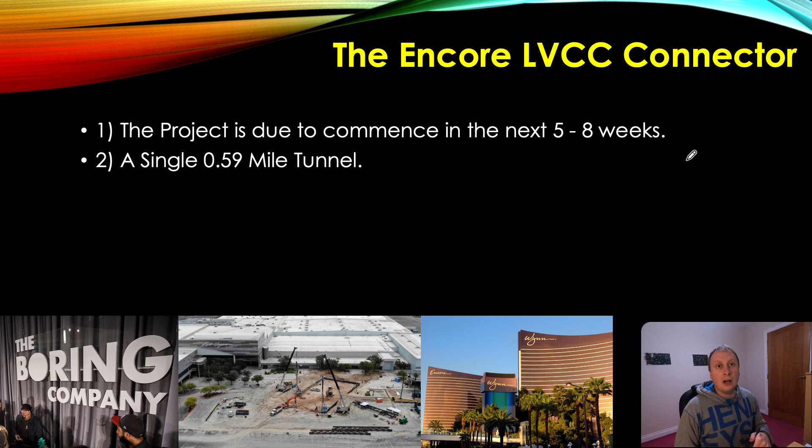It's a single tunnel, 0.59 miles long, which is a good length, slightly longer than the Resorts World tunnel. It also has a really good alignment, very, very straight for the majority of its route.

That's good for the TBM and for the conveyor belt system, because we don't want delays like we had with Resorts World. Hopefully they've overcome those particular issues with the conveyor belt system, spoil removal, that kind of thing, but hey, we will find out.

It will be built by Prufrock Revision 2, so it's kind of like a slightly revised version of the TBM that built Resorts World. As far as I can see, it looks pretty much exactly the same, but maybe they've made some changes internally with this particular model.

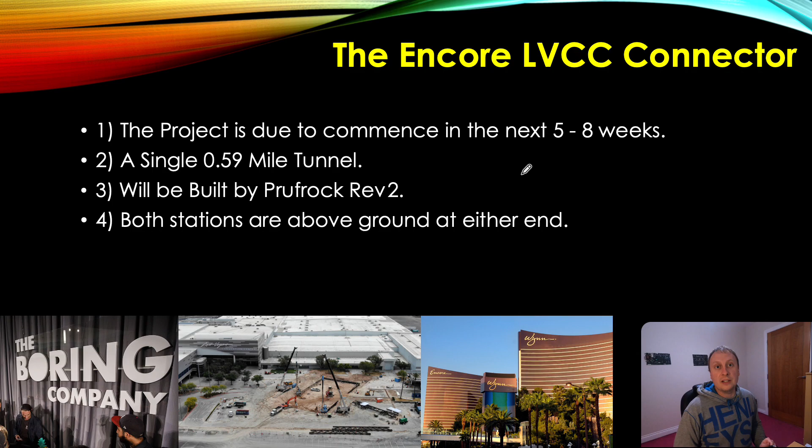Both stations are above ground at either end. This is the first actual project the Boring Company is going to use porpoising at the beginning and at the end as well, so there's no reception shaft, no launch pits. This is the most cost-effective means of building tunnels.

The connector will utilize 12 to 14 Tesla vehicles. I think they have 12 vehicles for running, and then they have like 2 reserve vehicles. I mean, that could change.

A lot of the documentation that I've got for this particular project is a little bit long in the tooth now, but I'm assuming it's still correct, although they did make quite a few changes for Resorts World, so I guess we'll find out.

It's going to have a fairly low capacity, this one, because it's just connecting the conference centre to the hotel, and you don't need large numbers of vehicles. It's a one-way system as well, so you're going to have stops and starts here and there.

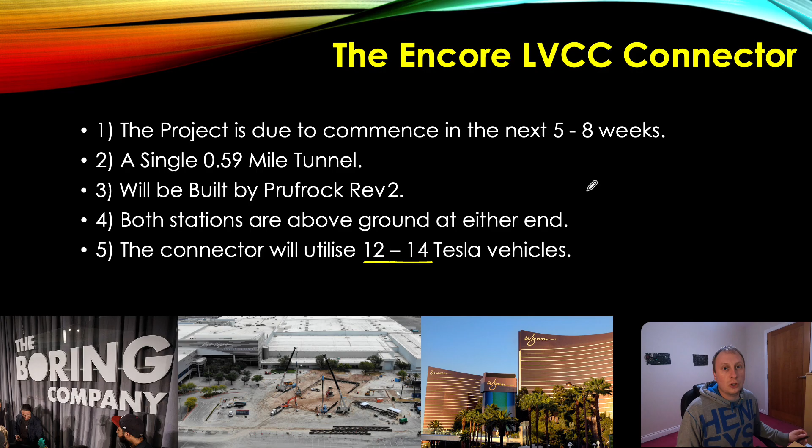Okay, so let's look at the contract documentation and discuss where it is and what's going on. First thing to note, I'm not entirely sure that this alignment is now correct.

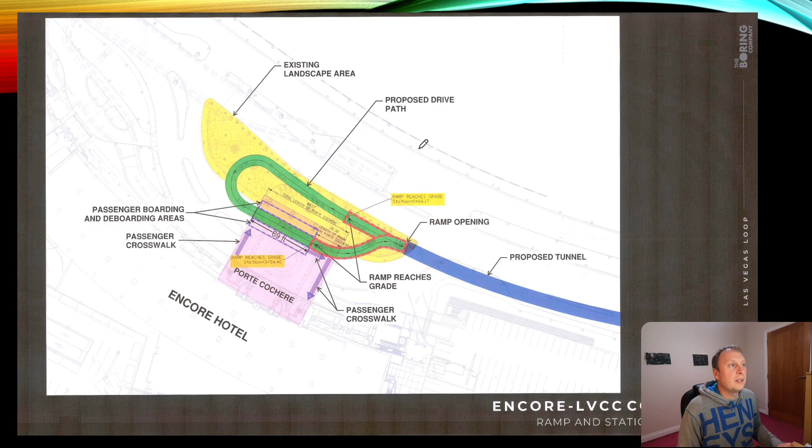As you can see, we've got this fancy French word here, which I'm not even going to attempt to pronounce, but it's basically a covered area at the front where people can wait outside of the searing heat of Nevada, as it were.

What else have we got? So this, I believe, is the actual alignment. That's what I think anyway. Let me just pull that back. There we go, so as you can see, it's going to connect up to Station 2. You can get out of the vehicle here and then get into the station. You'd have to go to the surface, then down the escalator, and then you could get a vehicle either to the new part of the conference center, or down to the old part, down this kind of direction here.

In terms of radius of this curve, it's fairly gentle, around 300 to 500 meters, somewhere in that ballpark. And then it pops up here, so it porpoises. I'm presuming—I'm not 100% on this, but pretty close, let's say 99%—that this is where Prufrock will start, and then it'll drive under here.

As I've said before, very little preparatory work has taken place in this particular area. It doesn't look like they've hoarded any of this area off as of today. That might indicate they're not going to be starting for a fair while, but I still believe 5 to 8 weeks is about right on this one.

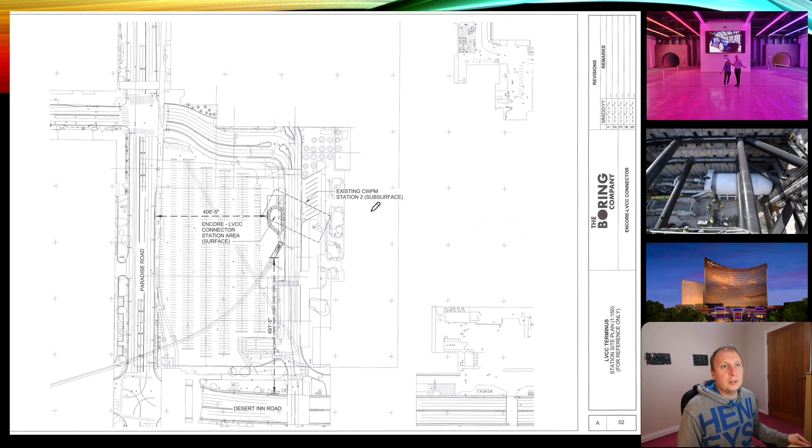Some parking spaces will be lost in this area. It's not a big deal, they've got thousands of parking spaces. I'm sure the Wynn Casino has parking spaces as well, so it's not like people are going to have to lose spaces overall in terms of getting there.

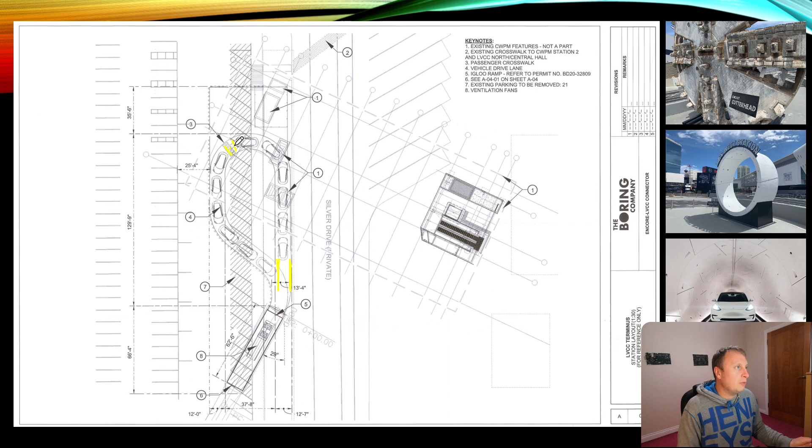It should be an easy project, this one. It should be very easy. The key things I'm going to be looking at are when does it start and when does it finish—therefore I can ascertain how many meters per day they will achieve for this particular project. As you know, for the Las Vegas Convention Center project, they're getting in the region of 26.5, 27.2 meters per day, that kind of ballpark.

Some days better than others. For Resorts World, they had that major stop in the middle. Prior to that major stop, caused via the conveyor belt system failing, they were getting over 15-20 meters per day, which is kind of okay, but not great really, considering that the selling point of the boring company is speed of boring.

On this particular project, anything less than 30 meters per day I consider a little bit of a failure, if I'm very honest with you. It should be well into the 30s now. They know the geology, they know the machine, they've got a good team there—they should be smashing this, really. So unless there's some kind of major issue again, I'd expect them to be well above 30 meters, potentially getting close to 40 meters, if not 40 meters.

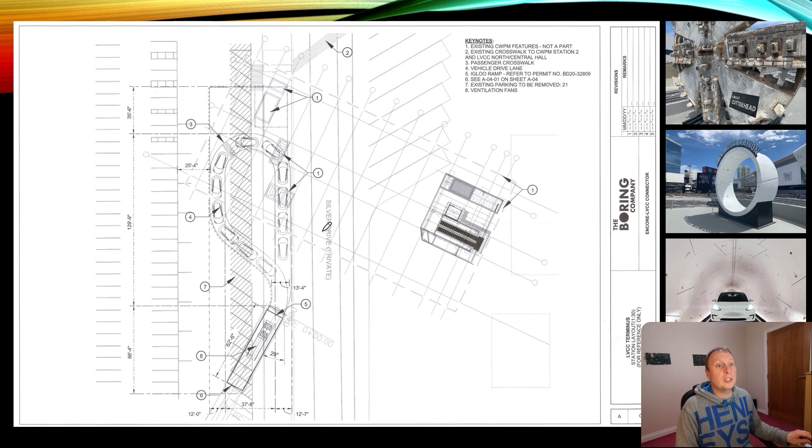So there you go, that's what my thoughts are.

This is another kind of top-down view of the system. Fairly self-explanatory, as you can see. That's the turnaround area here, there's the launch part, and then here it is—it goes into the existing casino here, so it porpoises up around here.

How will they build it? That's a very good question.

It's possible they might build it in advance and then tunnel through that area, or they could do it retroactively, wait until the TBM has passed this point, and then go from the surface down. They could build a shaft, sheet piling, excavate it, and when they get to the tunnel area, break out the side of the shaft. Obviously they'd have to have some form of reinforcement in the tunnel itself, because ultimately you're breaking off one part of the arch, which would make it unstable. It's disappointing we've not got a diagram of that, because from a construction perspective it'd be interesting to know how they intend to do that.

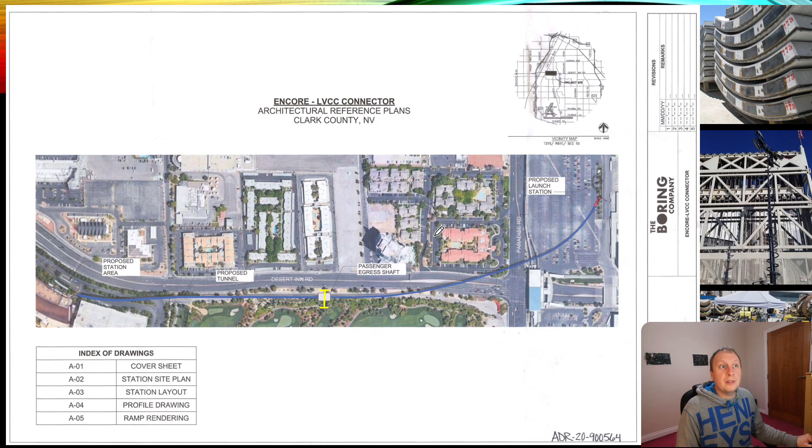But there's many ways to do it. It's not that complex, and as long as they've got reasonable amounts of room here to do the work, they shouldn't have any issues. It doesn't look like they will have an issue there in terms of availability of land.

Initially, the TBM will move fairly slowly. We're talking maybe 7, 8, maybe up to 10 meters per day to begin with, just because it's starting on the cradle. It's very difficult for it to push off the cradle with as much force, so it's probably going to be somewhere closer to 6 to 7 meters. Once it gets going, it should be well above 30 meters.

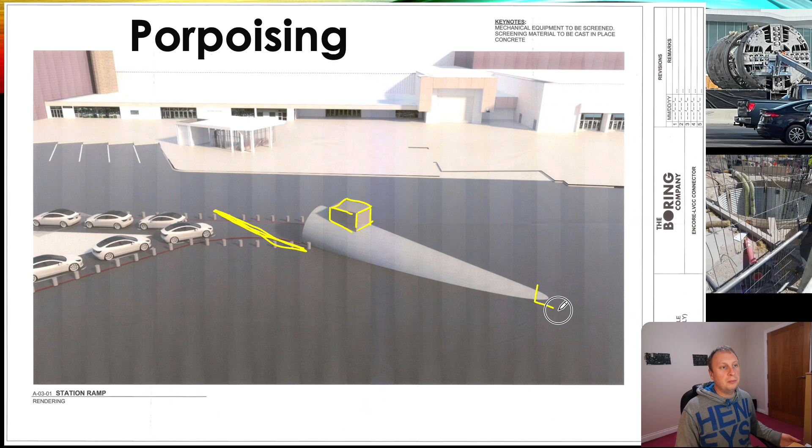Here on top, if you're wondering what this box is, it's some kind of ventilation system. Kind of looks not really the most aesthetically pleasing thing in the world. Not sure that's how I would have done it. I might have built something down here. Wow, and on there it just kind of looks a bit of an add-on really.

But yeah, here's the vehicles queuing. As you can see, it's just a very simple structure. This area here that they're going to be building is going to cost next to nothing really. You basically just mark it out, set up some bollards, and maybe have a gate at one area so you can bring vehicles in and out. And Bob's your uncle, that's it.

There's no covering or anything like that. This could cost less than $250,000 easily, maybe way less than that. Who knows? But this is kind of the Boring Company's approach, where they want to drive down costs. Everything's nice and cheap. We don't need this, we don't need that, just remove it. If it's not necessary, just remove it.

I like this project, I think it's going to be a good project. I just want to see them make progress with Prufrock. Prufrock progress, getting 40 meters, that would impress me. If this project rolls in after like 2 or 3 months and it's only done 17-18 meters per day, it's going to leave me a tad disappointed. But I'm hopeful that issues have been overcome, they figured out this kind of cassette system for the conveyor belt, and we're going to see 40 meters. That's what I think and what I hope is going to happen, and I guess we'll just find out.

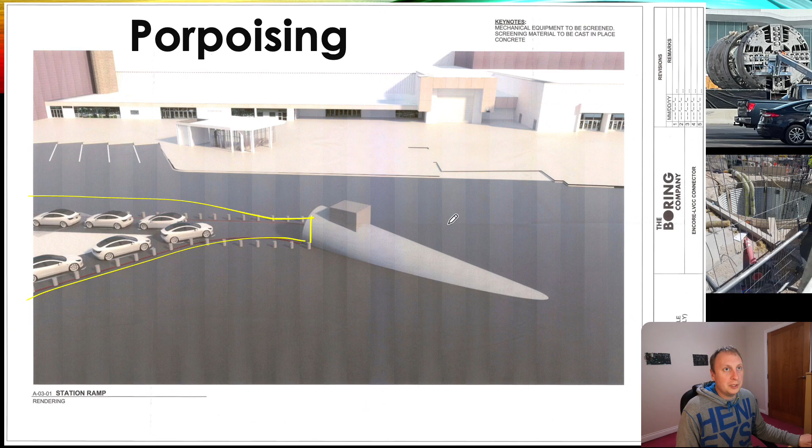But I will keep you updated on this particular project.

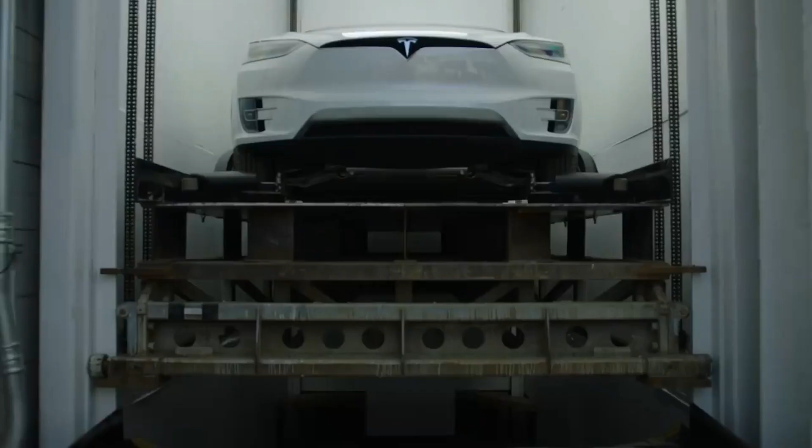And with artificial intelligence, we are summoning the demon.